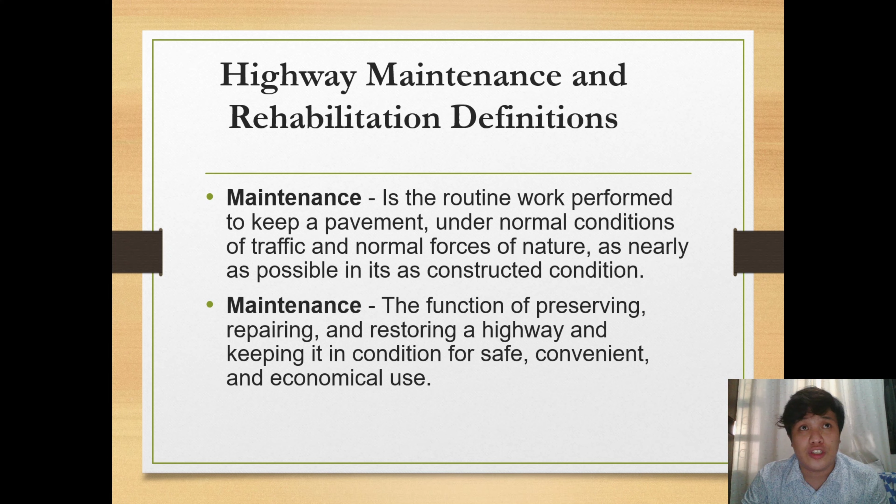Highway maintenance and rehabilitation definitions. Maintenance is the routine work performed to keep a pavement under normal conditions of traffic and normal forces of nature, as nearly as possible, in its as-constructed condition. It is also the function of preserving, repairing, and restoring a highway, keeping it in a condition for safe, convenient, and economical use. So maintenance of the highway is routine work to keep a pavement in condition, basically for use of the people.

It includes both physical maintenance activities such as sealing, patching, filling joints, and so forth, and also traffic service activities which include painting, pavement markings, and litter removal. Since we are living in a tropical country, we are not applying the removal of snow and ice since we only have two seasons.

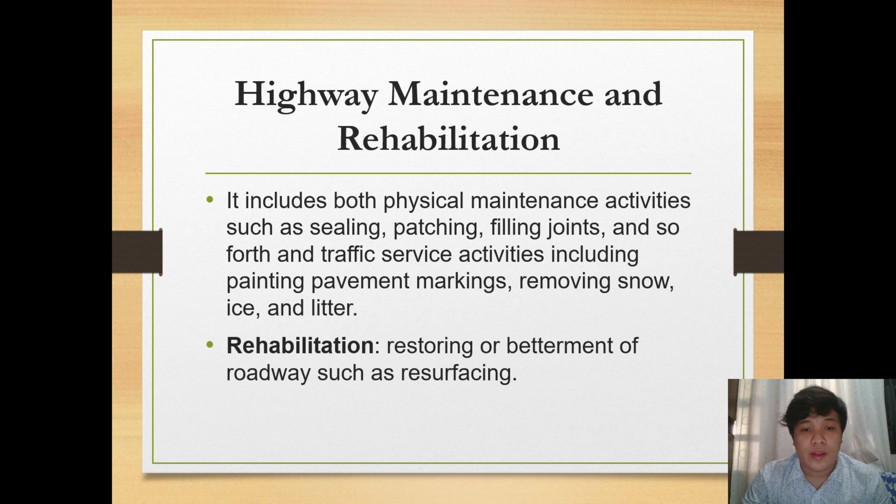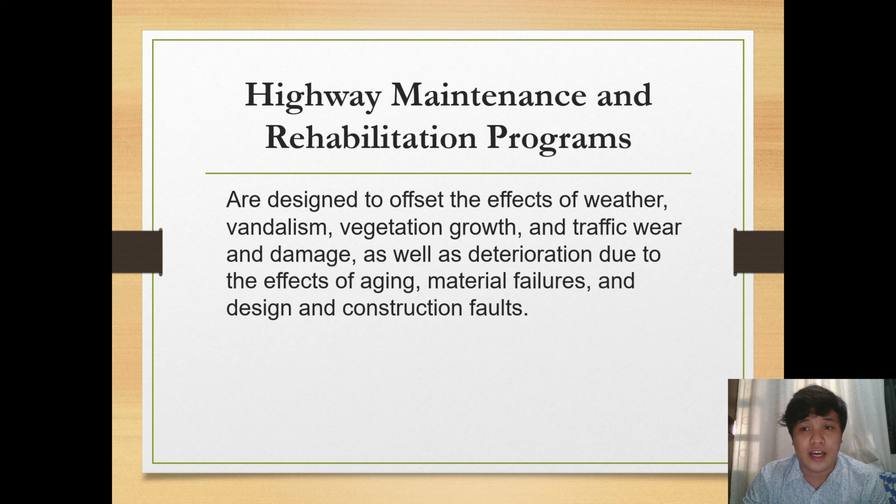Rehabilitation is restoring or betterment of roadways, such as resurfacing. It talks about the renewal of pavements. Rehabilitation programs are designed to offset the effects of weather, vandalism, vegetation growth, and traffic wear and damage, as well as deterioration due to aging, material failures, and design and construction faults. This is a program designed to offset the effects of all the stresses that cause our pavement to deteriorate.

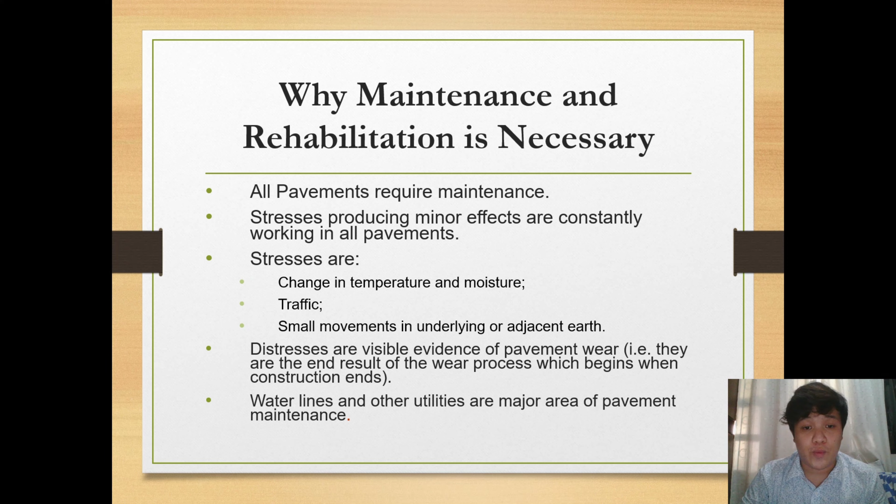Why is maintenance and rehabilitation necessary? All pavements require maintenance, but stresses producing minor effects are constantly working in all pavements. This includes changes in temperature and moisture, traffic, and small movements in underlying or adjacent earth. Distresses are visible evidence of pavement wear, the end result of the wear process which begins when construction ends. Water lines and other utilities are a major area of pavement maintenance.

How important is highway rehabilitation, and of course its challenges. The importance is that it protects investments made in highways, the economy, and safety of the public road system. It is one of the main reasons why we have an increasing economic status today.

It connects cities from countries to countries and so on. The challenges include increased roads, additional mileage of travel, road function and classification, vehicle sizes, and traffic. The traveling public expects a higher level of maintenance, and there's the size of the maintenance budget.

These are the challenges, because when we have rehabilitation in highways, we need to have an alternate road - that's an example of the increased roads challenge. And a particular challenge is the size of the maintenance budget; we need to compute the exact budget for it.

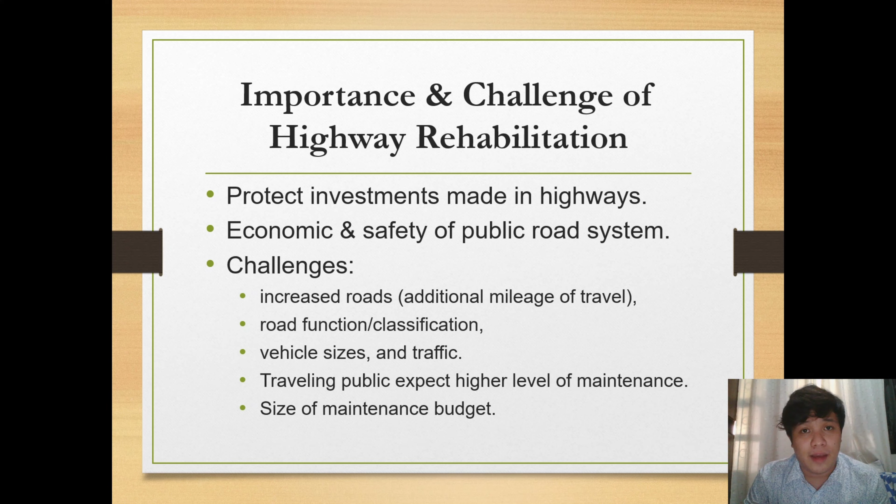Some effects on highway rehabilitation: urban highway rehabilitation projects create problems not only for state highway agencies and motorists but also for commercial premises. For businesses dependent on highway traffic, these projects can potentially disrupt the flow of customers that provide essential business revenue. One of the effects is especially for the business industry.

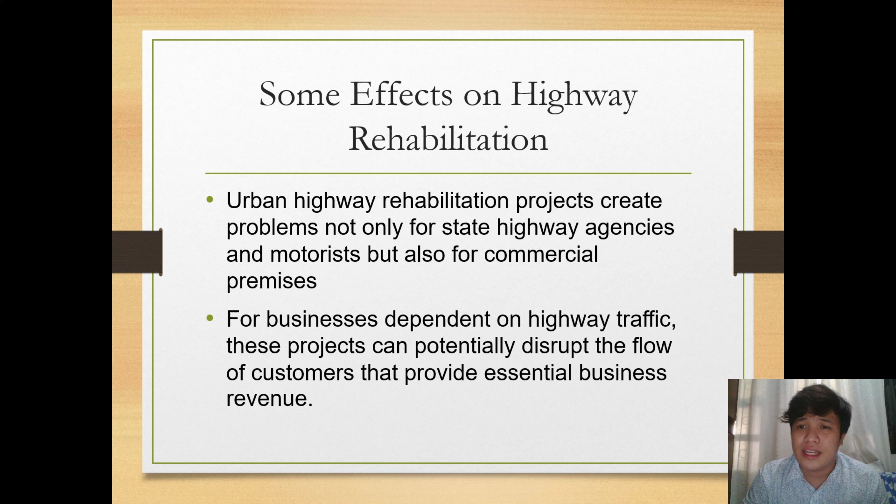Highways are really needed and important, for they connect businesses to people, allowing them to provide essential needs of customers, like food and school supplies. We need to have proper highways, so highway rehabilitation really gives a negative side to businesses during the process.

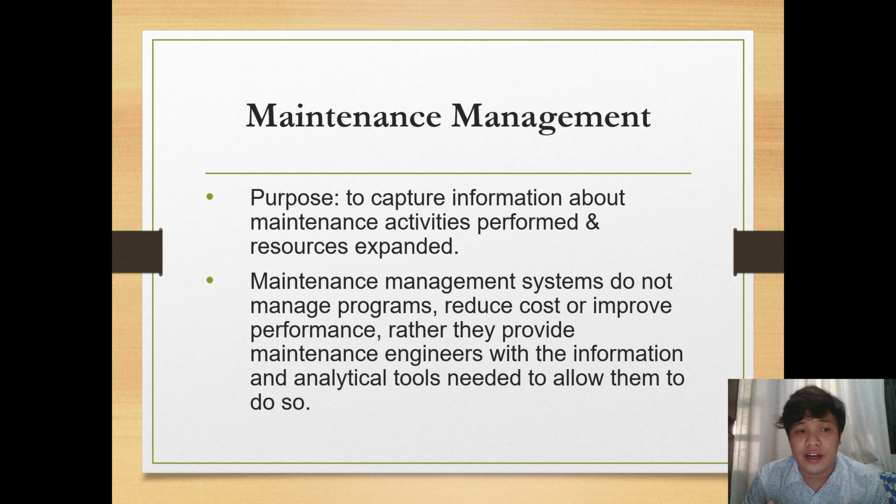Next is maintenance management. Its purpose is to capture information about maintenance activities performed and resources expended. Maintenance management systems do not manage programs, reduce costs, or improve performance directly. Rather, they provide maintenance engineers with the information and analytical tools needed to allow them to do so. During this procedure, we need engineers or professionals.

These are the elements of maintenance and rehabilitation management program: development of annual work program, defining activities and quantities, establishing performance standards, road inventory and inspection, estimating the size of the work and program, budgeting and allocating resources such as labor, equipment, and materials, work authorization and control at various administration levels, scheduling, balancing workload throughout the year, performance evaluation, work progress and productivity, and fiscal control - monitoring status of expenditures yearly.

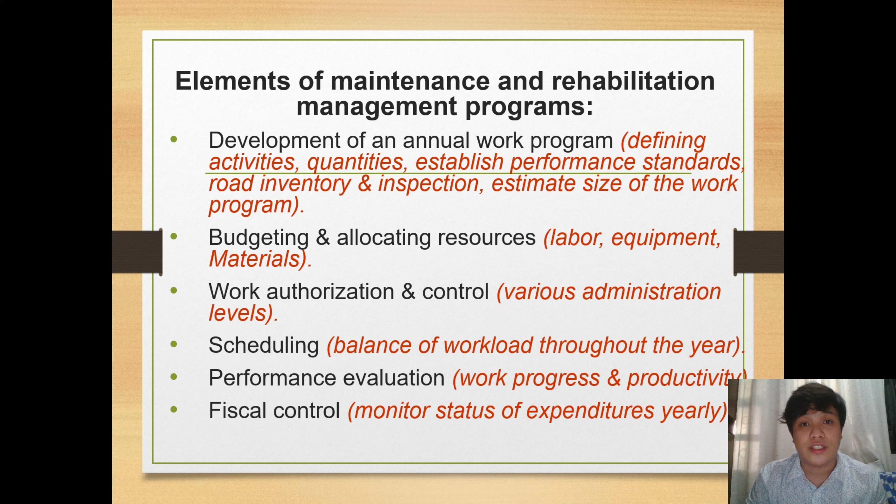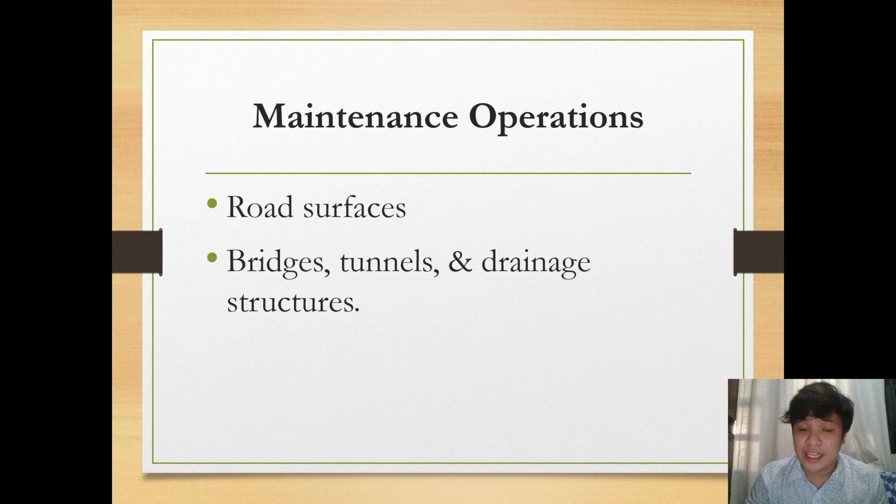For operations, we have samples of road surfaces and bridges, tunnels, and drainage structures. For road surfaces, aggregate road surface failures are due to improper drainage, poorly mixed materials, and inadequate foundation. Next is bituminous surfaces - failures are due to weathering, failure of base or subgrade due to material quality or compaction, or improper drainage. Next is plain cement concrete (PCC) surfaces, where failure is due to buckling.

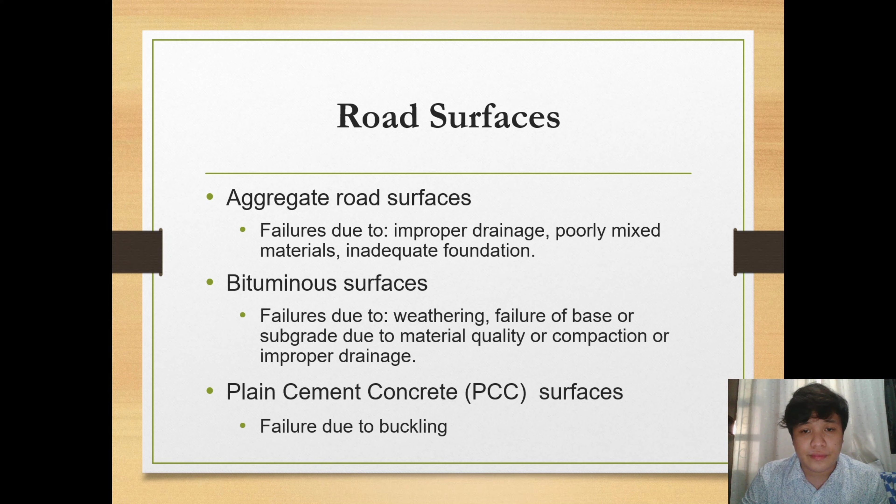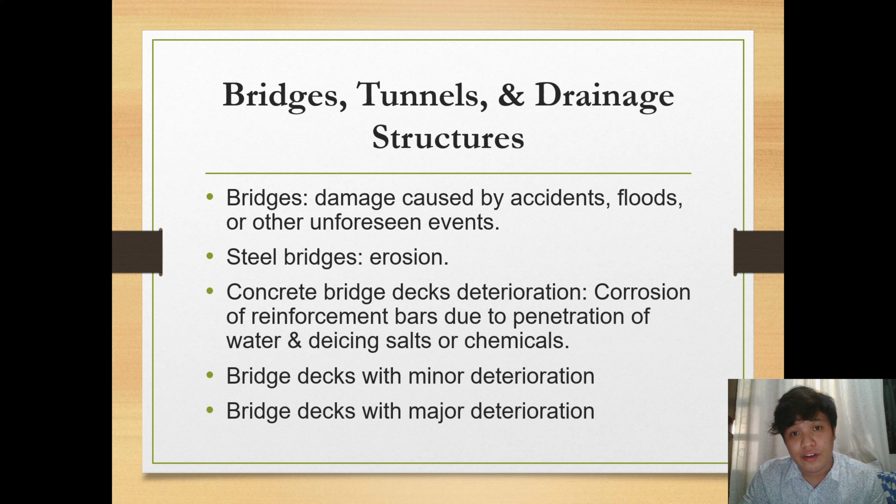For bridges, damage is caused by accidents, floods, or other unforeseen events - mainly floods and accidents. For steel bridges it's erosion, and for concrete bridge decks, deterioration is corrosion of reinforcement bars due to the penetration of water and salts or chemicals. This applies to bridge decks with both minor and major deterioration.

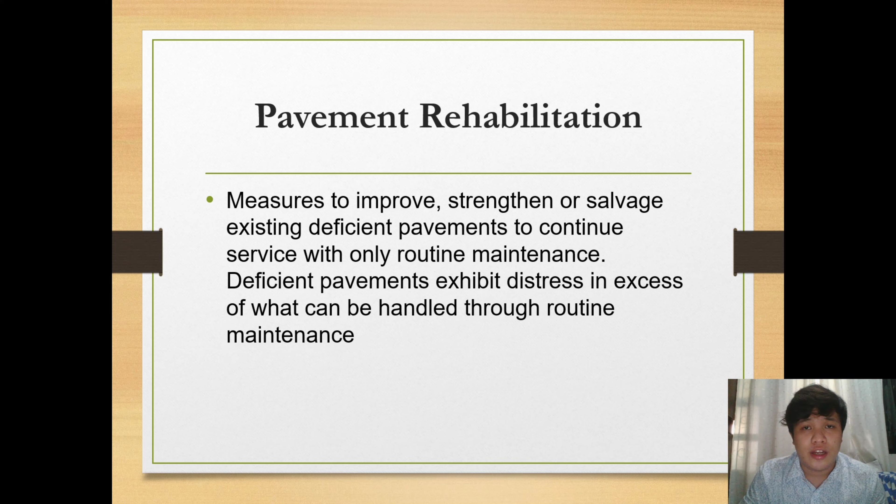Pavement rehabilitation measures improve, strengthen, or salvage existing deficient pavements to continue service with only routine maintenance. Deficient pavements exhibit distress in excess of what can be handled through routine maintenance. We need to improvise or renew the strength of the pavement so it can handle stresses due to traffic or movements of the earth. Proper maintenance also extends pavement life.

However, even the best maintained pavements will deteriorate with time and will need rehabilitation. Conventional rehabilitation methods include reconstructing with all new material, or patching and overlaying with a new wearing surface. Due to high construction costs, new methods of rehabilitation have arisen, such as pavement milling and pavement recycling, which will be explained by our next reporter.